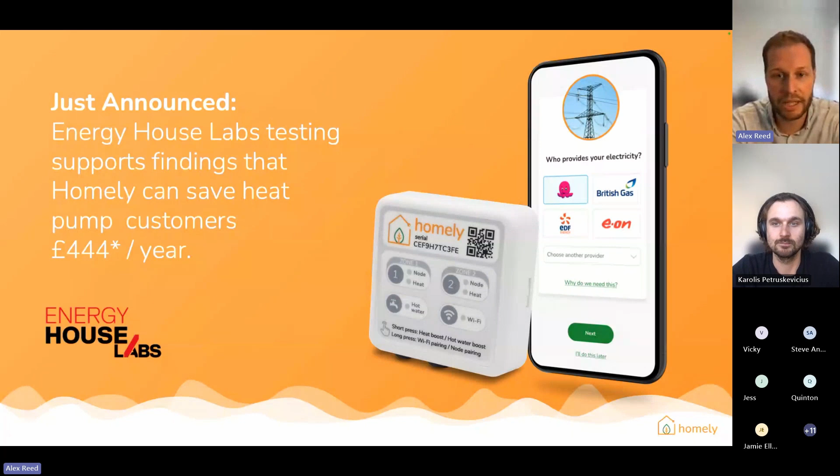Now, moving on, there are 6 things I want you to take away from this webinar. The key takeaways for you to remember: as an installer, Homely is going to make sure there is no manual weather compensation that you need to worry about. It's also going to give you better installer insights, and because you've got better insights, you will also have fewer callbacks.

On the flip side, with regards to the customer, there is a saving of up to 22% increase in efficiency. Just so you have an idea of what that's comparing to, that's a fixed tariff at 55-degree flow rate versus a fixed tariff with Homely. There is also up to 31% reduction in heating bills, and by way of comparison, that's a fixed tariff versus a time-of-use tariff with Homely, specifically with Octopus Cosy. The other benefit with that is improved comfort as well.

So the installer equation that we've come up with is that Homely is going to provide easier installs for you. You're going to have happier customers, and that's going to mean more business for you. Overall, Homely is a solution to make your life easier and give you less of a headache, allowing you to earn more business, and it further improves the heating business case through uber efficient running costs.

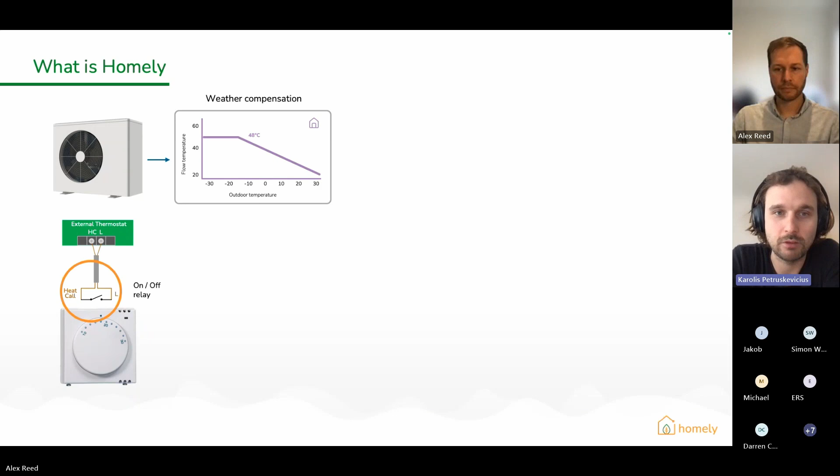Sometimes to avoid this tweaking and to avoid explaining what the weather compensation is to the end customer, it's a lot easier to put an on and off thermostat onto the heat pump. This is the thermostat that you would wire into the heat pump's external thermostat connections, where there's only one signal that can be sent. So this is the on and off, essentially.

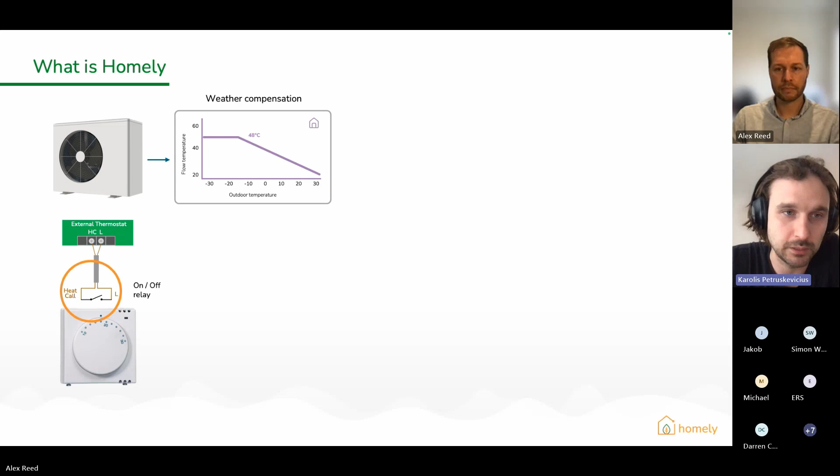The weather compensation that was set up initially will still be operating in the background. There is still a weather compensation that runs there, but you're now allowing the end customer to control their heating schedules through the third-party thermostat. What this means is that, because that weather compensation is probably set slightly higher, this external thermostat will work. All in all, this customer gets the comfort they want with an easy to use external thermostat set point interface, but they won't achieve the efficiencies they could if that weather compensation was set correctly.

So this is where Homely comes in. Instead of connecting into the on and off terminals of the heat pump, Homely connects the heat pump through what's called Modbus terminals. It's still the same easy installation of the 2 wires into the heat pump, but with an added bonus that no weather compensation on the heat pump needs to be set at the point of installation. Homely will learn that tailored weather compensation for each individual property as it's installed.

In terms of Modbus, don't worry too much about the protocol. It doesn't really matter what Modbus is. All that matters is that this way of communication, those 2 terminals available on the heat pump, allow Homely to communicate with the heat pump in a 2-way fashion. So we can not only send the on and off signals, but we can constantly be changing the flow temperature set points. We can check the hot water temperatures. We can read a lot of information from the unit.

For those of you who are familiar with the OpenTherm protocol that used to be on boilers, this is similar to that. It essentially allows us, rather than sending just on/off to the heat pump, to talk to the heat pump and ask it for different sorts of information, and also control it in a much better way.

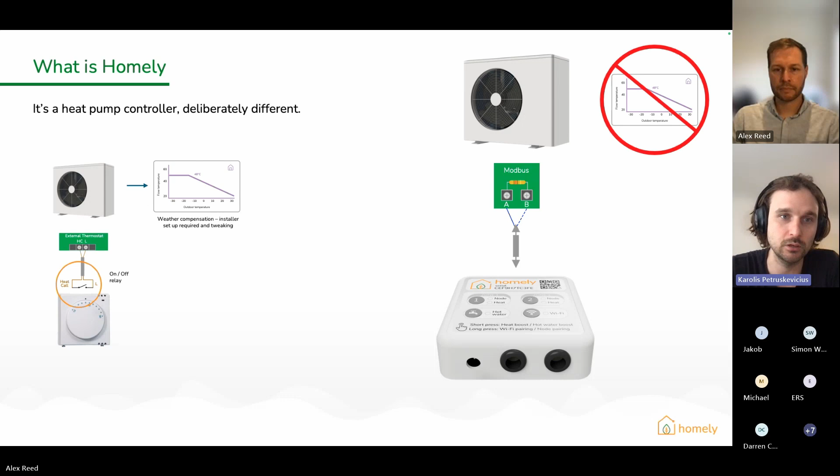There's 2-way communications. By monitoring all of this information from the heat pump, such as the heat delivered into the property, the flow temperatures, and combining it with the information we're receiving on the Homely side -- the outside temperatures, the solar forecast, the internal temperature readings of the property -- we can use all of this data to build this digital image of the property.

Essentially, after Homely has been in the property for a couple of weeks during the heating season, it knows what flow temperatures need to be sent to the heat pump to deliver the comfort the customer wants. And in turn, that's your weather compensation learned based on data, rather than the initial calculations done at the point of heat loss calcs.

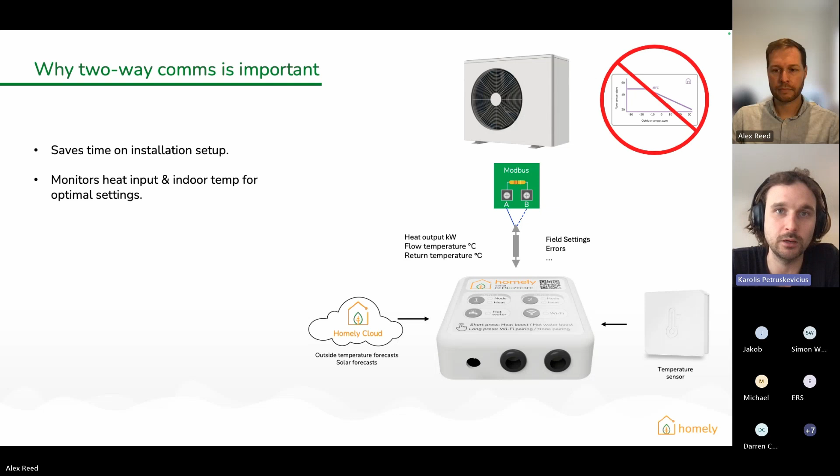As we tailor this weather compensation to all individual properties, it means the heat pump can be running at its most efficient flow temperatures, delivering efficiency improvements. What we've seen from the Energy House testing is this can lead to up to 22% efficiency gains on these installs. So it saves time on installations, monitors the heat input and indoor temperature for optimal settings to learn that property, to build this digital picture of the property, and in turn improves the efficiency of the heat pump.

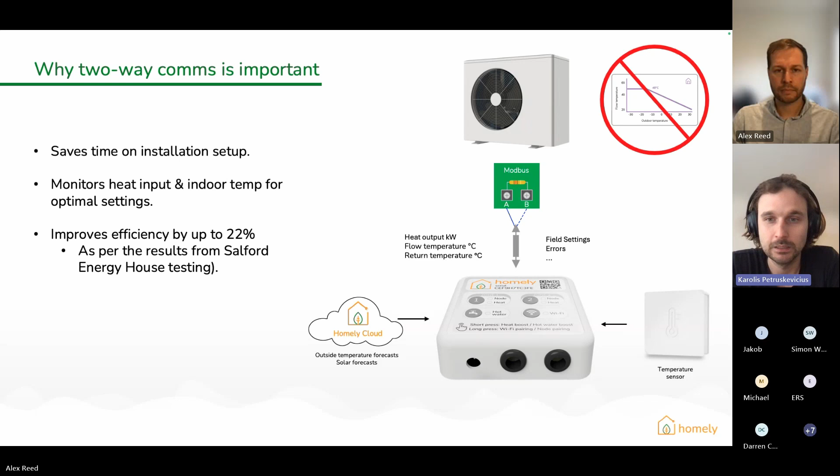So enough about the 2-way comms. Let's talk about what is actually happening behind the scenes and what this tailored weather compensation looks like.

With the Homely example, Homely will learn the weather compensation and tailor it to the property based on all the data it collects after installation. What we normally find is that this learned weather compensation is quite a bit lower than what would have been set at the point of install, if you were to just do the heat loss calcs based on the MCS guidelines. This is something we've observed in the energy house testing as well. This means that even without any external factors affecting the indoor temperature, Homely would already be sending lower flow temperatures to this property, keeping the heat pump running more continuously throughout the day, delivering heat in that low and slow fashion, rather than turning the heat pump on and off.

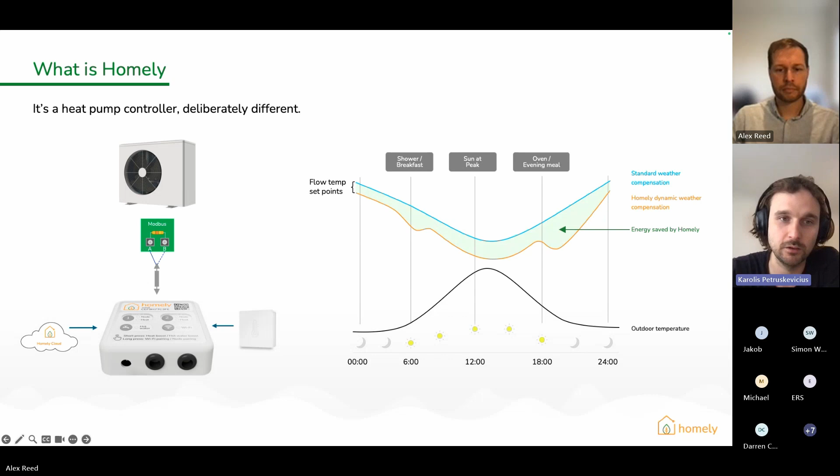All of these things are producing heat, and once again, the heat pump doesn't need to be producing heat in a similar fashion when these events weren't there. So Homely lowers the flow temperatures to reduce the amount of heat we're putting into the house using the heat pump, while still maintaining comfort, avoiding waste of energy.

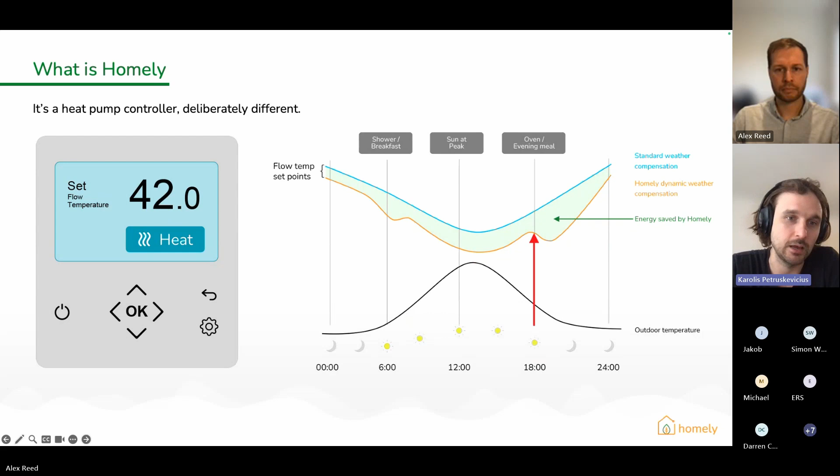To illustrate what would actually be happening, if you were to stand next to the controller of the heat pump throughout the day, you would see how Homely is changing the set flow temperature set point on the heat pump, and this would be dynamic weather compensation in action, considering outside temperatures, current indoor temperatures, predictions of outside temperatures, and customer set points. Every day is going to be different because those conditions will be changing, and you could see Homely reacting to these changes just by looking at that controller.

I appreciate I've covered a lot of complex stuff, but that was all just to share with you what Homely does in the background, so you understand the product better and why it can deliver what it can. Essentially, the point of Homely is to hide all of this complexity away, so you don't need to explain these things to the end customer. What your end customer will just need to know is Homely is there to take all the complexity away of the heat pump. So let Homely do the thinking.

As part of Homely, your customers will receive a Homely app that they'll use to control their heating, and this app has been made with simplicity at the forefront. So all your customers need to do is tell the app, in terms of their heating schedules, what is the minimum comfort level they're comfortable with. So if they'd like at least 20 degrees throughout the day and at least 21 degrees in the evening, that's what they tell the Homely app.

Then Homely will do all the thinking behind the scenes and heat the house in the most efficient way possible. So to be clear, if you had a setback temperature, say a morning and evening set point of 21 degrees and a setback temperature of 20 degrees throughout the day, Homely sees this as the minimum comfort levels. What Homely wouldn't do is, just as the morning set point finishes, turn off the heat pump and wait till the temperature drops to 20 degrees. It would know there is a set point later in the day, in the evening, of 21 degrees, and it will figure out the best thing to do.

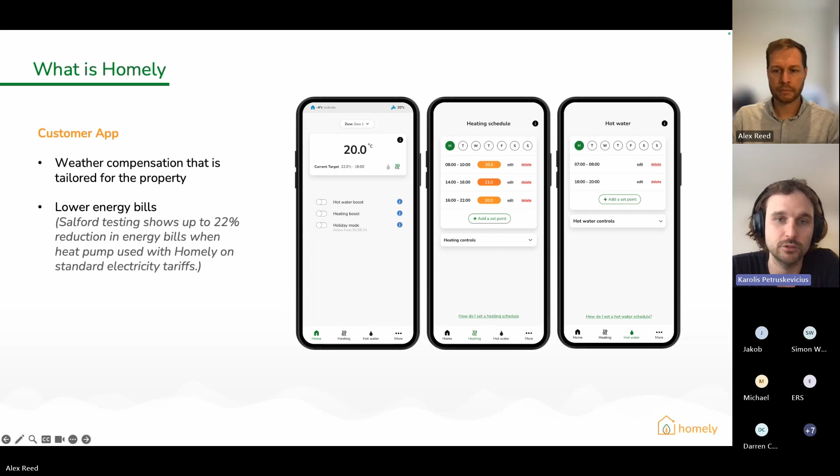So that was the Homely product for fixed tariff customers, essentially the perfect weather compensation, and still the majority of customers out there will have just that single rate tariff throughout the day. But Homely is there to provide a lot more than that. Not only can it improve heat pump efficiency on a fixed tariff, but it can actually be utilized with the time of use tariffs that keep on cropping up - these are the heat pump tariffs, even agile tariffs, where electricity prices are different every day. Homely is currently compatible with all time of use tariffs available on the market.

And what's very important to take away is Homely doesn't just try to blast the heat pump during the cheap times of the day. It does trade-offs between efficiency, because we all know that if we run the heat pump at higher flow temperatures during those cheap times, we'll be sacrificing some of that efficiency. There might be a price difference between certain pockets of the day to others.

It might not make sense to run that heat pump full out at 55 degrees just to put heat into the house, and Homely will do all that calculation for you. Because we've learned about the property in terms of how long it takes to cool down and heat up, we'll know what it makes sense to do with flow temperature. So it might be that we overheat the property slightly during the cheap times, using flow temperatures that aren't penalizing efficiency too much, and jump through parts of the more expensive periods, but not all of them. We'll talk more about this when we discuss the Salford Energy House results.

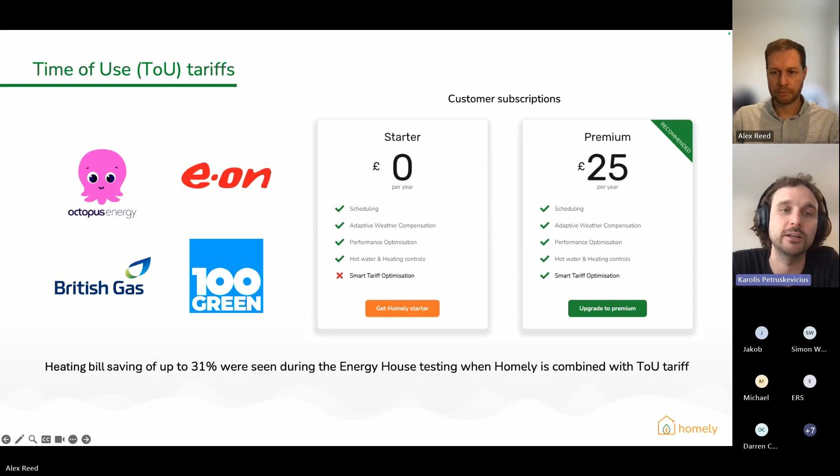With these cheaper tariffs, what Homely is essentially doing is using the customer's home as a battery. If we take an example where the customer says they'd like their house to be 20 degrees throughout the day, but they're comfortable with it going to 21 degrees, that's what they can set up on their customer app. They set their minimum temperature and specify the maximum temperature they're comfortable with. Homely will use this - think of it as a road we're given, and we need to move along this road at the best cost efficiency possible. So it can overheat the house slightly during the cheap times and let it coast through periods of higher prices. That's for the end customers.

So fixed tariff optimization and time of use tariff optimization are all great for end customers, but it's not all about end customers at Homely. We believe that the heating engineers installing Homely are the driving force behind mass heat pump adoption, as we understand that to deliver those ambitious goals of heat pump installations across the UK, the engineers need to be equipped with the right tools. Homely is here to help.

As we've already spoken about, Homely reads a lot of information from the heat pumps - flow temperatures, return temperatures, field setting values, errors, as far as refrigerant temperatures on some heat pumps. Having this information remotely is powerful. It means that when there are issues with heat pumps out in the field, you don't need to jump in the van and go there without knowing what the issue is. You can look at our monitoring platform, inspect the data, and go to the site prepared, avoiding those unnecessary drives to the merchant to pick up parts.

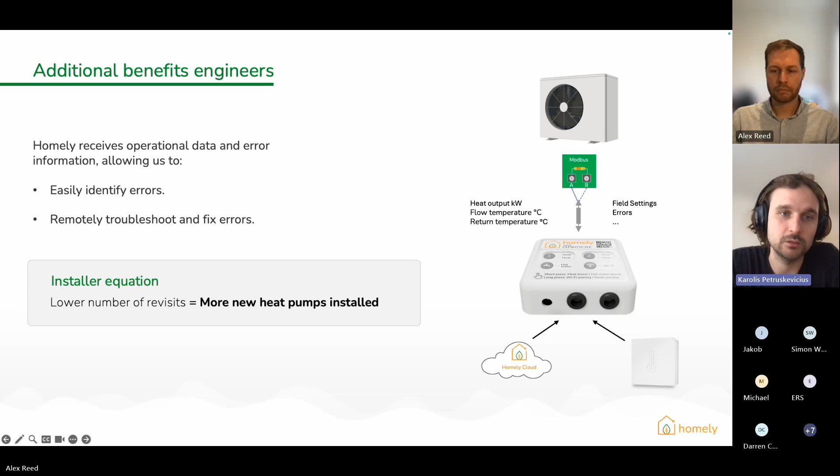Hopefully you'll know what the issue is before you get there, and you'll be able to bring the right parts with you. In some cases, and we've seen quite a lot of this, you might not even need to go to site, as you might be able to change heat pump parameters remotely - the ones causing these issues. Or in certain circumstances, it could be that the customer is just not understanding how the heat pump is operating, and by looking at this data, by looking at historical data, you can give them that confidence that all is okay and that's just the way the heat pump runs.

So, moving into the Energy House results - we've spoken a lot about the Energy House results, and we backed up Homely's savings using this data. I'm sure many of you on the call are eager to understand more about where these results are coming from. Historically, when asked how much Homely saves, it was difficult to give a concrete answer to that question, as in the field no two days are ever the same. So doing a like-for-like comparison of a house heating with Homely and without Homely was extremely difficult.

This is where Salford University's Energy House facility can really help. This facility is essentially a house inside a chamber where we can replicate the outdoor temperatures between days. So we can keep the external conditions the same, meaning we can finally compare apples for apples when judging how well Homely can perform and how it can save money for customers - essentially playing God with the outside temperatures, solar gains, and everything controlled.

So we've done testing for the last three months and put Homely through its paces. There have been a lot of questions on what we were actually comparing. When we released these Energy House results, we received some queries in terms of what is actually being compared - is it a fair test? That's what I'd like to dive deeper into today. All in all, the testing was extremely successful.

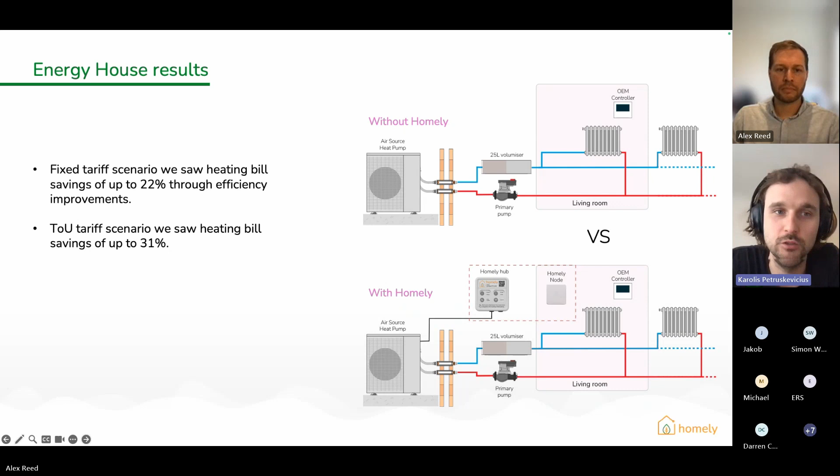And in between these two tests, there was only one thing that changed. The setup of the heat pumps remained the same. The only thing that we did was install a Homely on it. We feel like that's really important.

To start with, that system design that we were comparing against, we wanted to make sure that the system is designed correctly. And what we didn't want to have is TRVs, buffer, glycol, secondary pumps. Essentially, we wanted to see how much benefit the Homely system can deliver on a system that is performing well already. And that's what we've done.

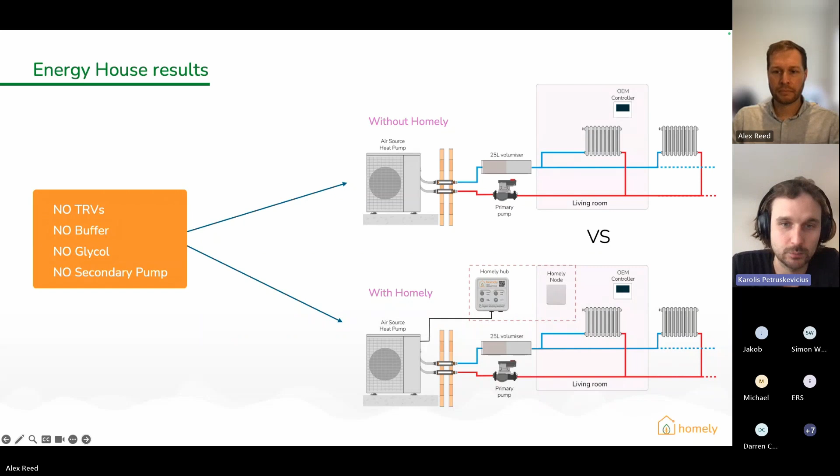When picking the base case, one thing that was extremely difficult is trying to figure out what is that base case that we're comparing Homely against. To pick a base case that everyone is going to be happy with is nearly impossible. We will get questioned on why have you chosen this, why have you chosen that. That's why we had to use some guiding principles in terms of picking this base case.

Because this Energy House testing was done with an academic partner, we had to make sure that everything we do stands up to academic rigor. We also wanted to make sure that these results are useful, not just for us, but for the industry itself. That's why we need to make sure it also stands up to industry rigor.

So for the base case control setup scenarios, we had to go out there and do a little bit of research on how the systems are being set up at the moment. We found 3 answers, one of which was quite surprising.

Talking to our partners, talking to some of the installers that work with us, we were told that one way to set up a heat pump is as per the distributor manual - essentially what the distributor tells you to do. That's what you put in as the weather compensation at the point of installation. That didn't quite stand up to the academic rigor requirement because each distributor tells you a slightly different kind of setup rule. So we couldn't use a particular distributor just to say that this is the standard way to install it.

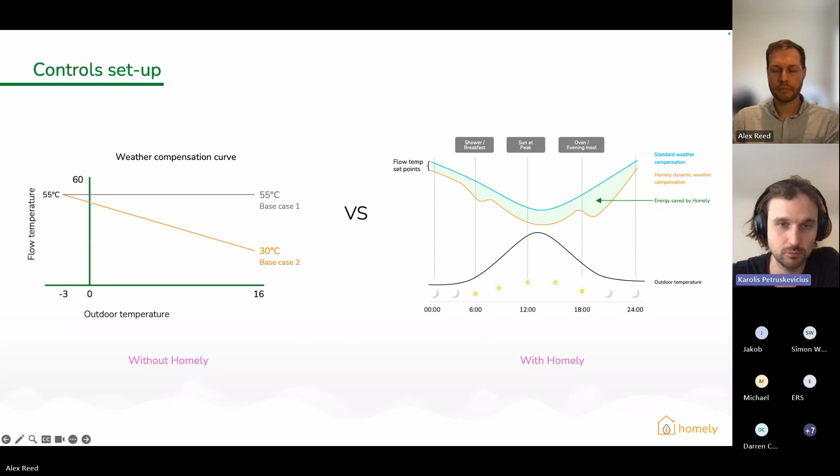So essentially these were the two base cases that we were comparing against, and on the Homely side, there is no static weather compensation curve that can be considered. It's always changing, always adapting to the internal temperatures, and that's what we had - the Homely scenario was that dynamic Homely weather compensation curve. And these were the results that we had.

So we've done quite a lot of testing. The whole testing had to be - we couldn't test the whole winter, essentially that's too many days in the energy house. What we had to do is test a shoulder season day.

That was a representative shoulder season day and a representative winter season day. From these results, we then had to scale them into an equivalent annualized result in terms of the savings.

This is because if a majority of those periods when you're heating your house fall into the peak price electricity periods, or even the day rate, that might turn out more expensive than what you could have done by just sticking to the fixed tariff and running your heat pump on normal weather compensation.

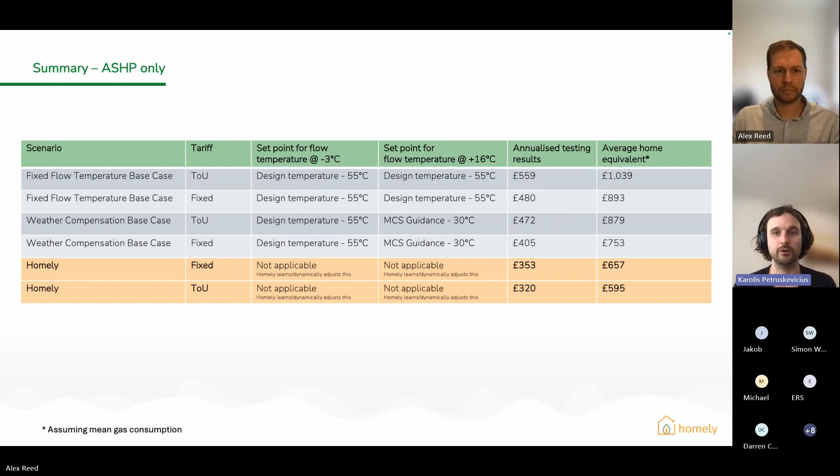Win-win for everyone. Just before I finish off on the Energy House results, the time of use tariff scenarios were really interesting, and this is where I've stressed before that it's really important for us to do the right thing if we are choosing to go for these time of use tariffs.

What we were testing in the Energy House was a Cozy tariff, Octopus Energy's Cosy Tariff, which is a heat pump tariff with pockets of electricity that are really cheap. So you can see these as off-peak price at 15.91p, day rate 26.5p, and then peak rate 42 pence per kilowatt hour.

What we can see Homely doing here, an important point, is that Homely runs during the off-peak times a lot more than other periods of the day. So energy consumption percentage during the off-peak periods is 60%.

But the flow temperatures that we're sending to the heat pump - the flow temperature set points - were actually not that high. In this scenario, we can see that we were sending only 43.8 degrees average flow temperature.

This comes back to the point that Homely doesn't just blast your heat pump full on during these cheap times. It does a trade-off between the price differences among off-peak, peak, and daytime, and what's the efficiency of this particular heat pump if I'm going to raise those flow temperatures - if I run that heat pump a lot hotter, does it mean my efficiency will be diminished more than what I could have saved by just running it flat out normally on the day rate? It's important to note those flow temperatures are not too high during the off-peak times.

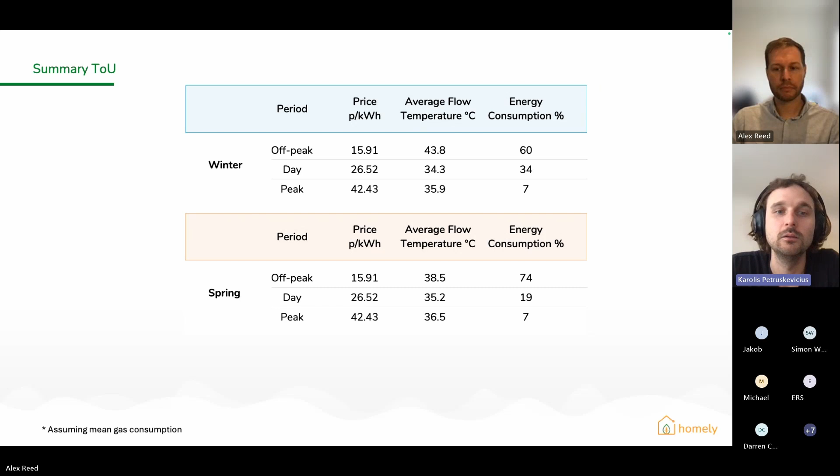So, in the winter testing day, we used 60% of the energy during the off-peak. On a spring day, we used 74% during the off-peak.

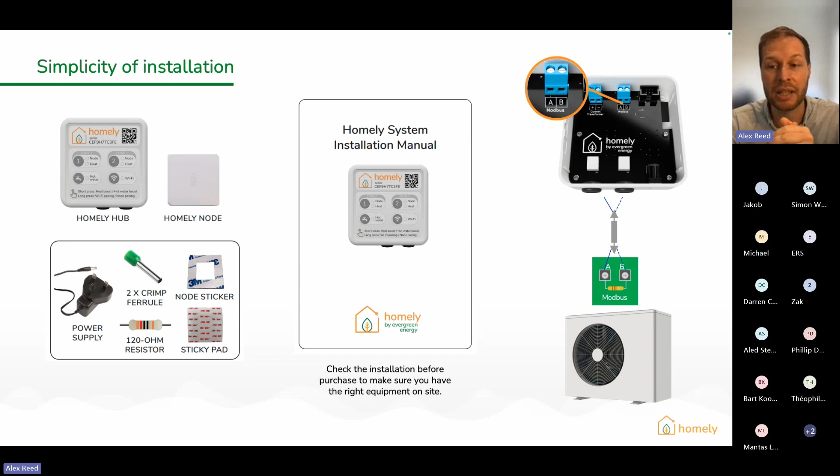You can find all of this information in the manuals, available on our website. If you go to the installer page, you'll see the list of heat pumps such as Samsung, Daikin, Midea. Click on them and it instantly opens the manual for that heat pump, and you can follow the installation guides. I'd recommend making sure you have all of the heat pump components, especially for Samsung and Daikin, which can be sourced from various distributors up and down the country.

That being said, we don't want to leave you high and dry. We also have a YouTube channel with our installer processes, showing you how to install Homely for the different heat pump brands and the controller configuration. I'd recommend going onto the website to make sure you've got all the parts you require and fully know how to do that installation process. We have YouTube there to support you as well, with just a couple of minute videos.

Going back to what I mentioned at the beginning, there are 6 key takeaways I want you to remember. As Karolis went into detail, there's no manual weather compensation to worry about—Homely sorts all of that out for you. There's also better installer insights, and because you've got those better insights, you also have fewer callbacks. Now that's for the installer side.

For the customer side, it's up to a 22% increase in efficiency, comparing a fixed tariff at 55-degree flow rate versus a fixed tariff with Homely. You could also get up to 31% reduction in heating bills, comparing the fixed tariff versus the time of use tariff with Homely, specifically Octopus Cosy. Your customer also gets overall improved comfort because Homely is dynamically adjusting that flow rate. So Homely is the solution to make life easier for you, the installer, with less headache, allowing your customer to be happier, and allowing you to earn more business for yourself.

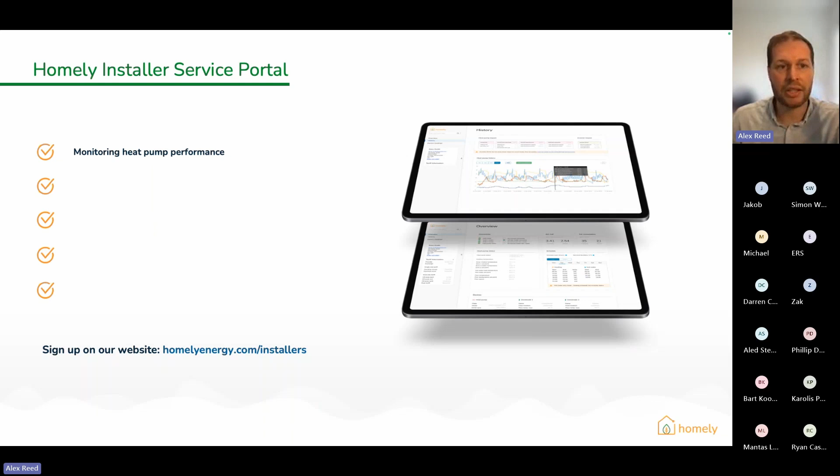It also allows you to have remote changes to those heat pumps. So going one step further than knowing what the heat pump is doing and anticipating if you need to go to site or not, we've gone a step further, being able to give you remote access.

So you don't even need to go to site, and you can save yourself that trip to Mary's house, for example, to go and double check what's happening with that heat pump.

We are brand agnostic as well, so we integrate with those ten brands that I mentioned earlier. They will all be in a central location of the portal, and you can just go through each of those brands, whether it's LG, Clivet, whoever it may be, and it means you're not having to dive off and sign into the Samsung portal or the Clivet portal. It's all going to be in one central location for you.

We also provide automated alerts, so this will empower you and make you look even better as the installer, because you can get ahead of the curve if Mary's about to give you a call because she's not sure what her heat pump's doing. You'll get an alert prior to that if something has happened, and you can then let Mary know that you've noticed this and already sorted it, and you look fantastic.

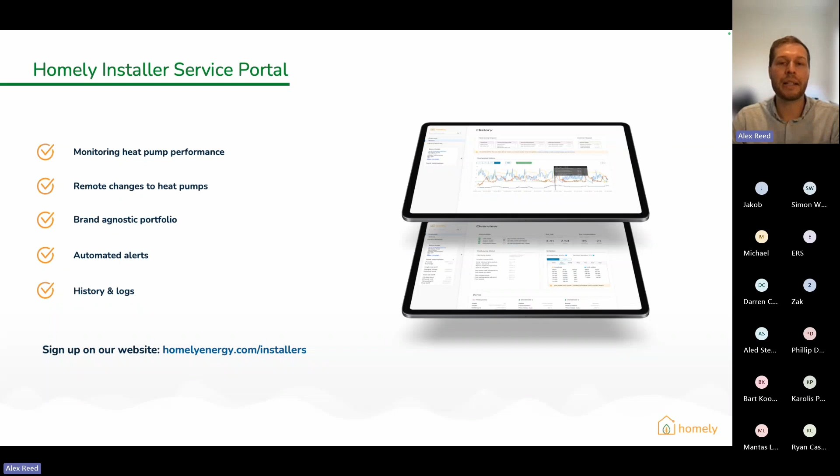And we also provide the history and the logs as well. So if you're at Mary's house for whatever reason and you're thinking, what did I set the heat pump up to, trying to have a think, you can simply go into the installer service portal, see exactly what the logs are and what the history is, and you know exactly where you are. So we're empowering you in that regard as well.